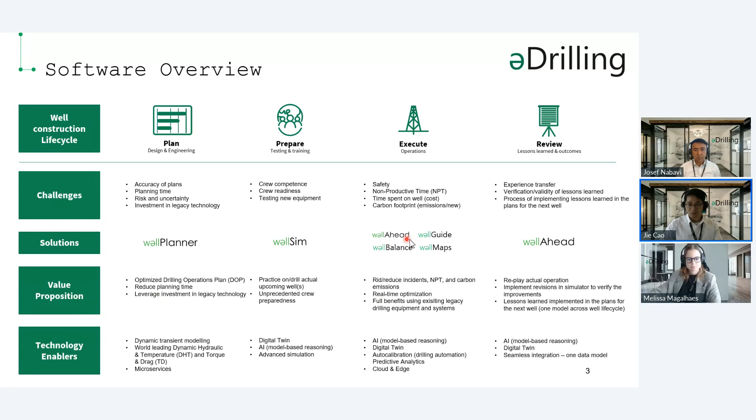Today, our main focus on hazard detection and avoidance will be using the software called wellAhead, shown in the middle. But of course, you are more than welcome to ask for a demo of other applications if you are interested.

So next, drilling hazards, as we all know, are the most unwanted situations during operation, which might lead to severe problems or disasters and increase the expense due to NPT or remediation operations. So to reduce or avoid that, the main technology behind our software wellAhead is 3 cornerstones as listed here. First is the dynamic transient modeling, which combines the thermal-hydraulic wellbore model with the torque and drag model, embedded with a theoretical ROP model.

So based on those dynamic models, we have built a digital twin together with real-time streamed data from the rig. And in terms of detecting potential events or hazards, we used model-based reasoning, a part of AI technology, to detect anomalies by comparing what we observe from the actual well or rig with the predicted behavior from our digital twin and modeling. Based on this comparison and detection of discrepancies, we detect potential anomalies or hazards that we might encounter in the near future.

So all those three main technologies enable us to do a lot of jobs like automatic detection, diagnostics, predictive analysis, analyzing what-if scenarios, and also forecasting your drilling performance. So that's the main technology we have been using in wellAhead.

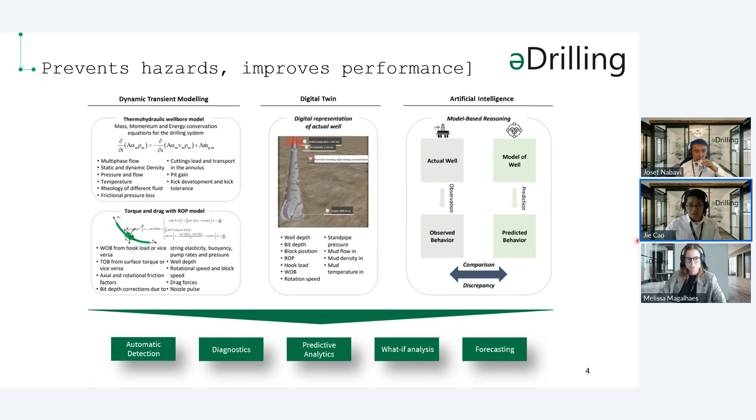Next, more specifically in wellAhead, it helps us to do automatic monitoring and predictive analysis, so as to avoid hazardous incidents, to reduce or avoid rig downtime, and to make more informed and better decisions.

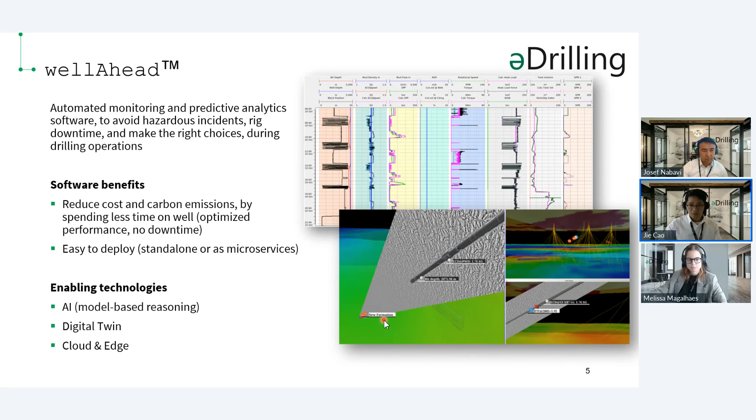So that's mainly wellAhead, which we used for today's topic. This software and technology has been there, as I mentioned, since 2008, and right now it has been applied cumulatively to more than 400 wells.

Next, I would like to hand over to our expert Josef to talk about more specific examples of how we help customers avoid hazards or incidents and increase drilling efficiency. So, Joseph.

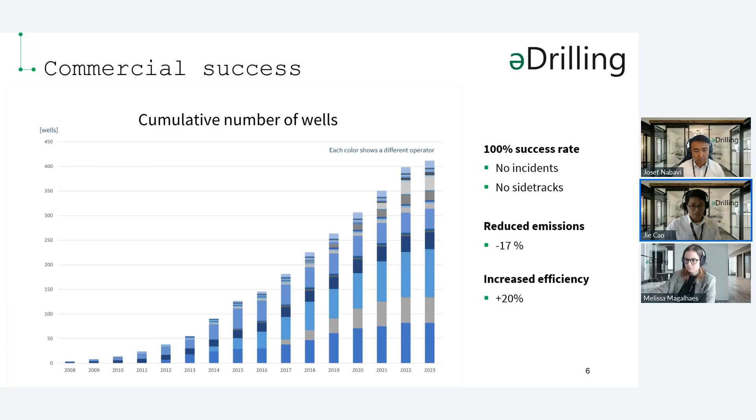Thanks, Jie, and hello, everyone. My name is Josef, and I'm going to share with you some actual examples of how wellAhead reduces incidents and NPT, increasing the safety of the well and its efficiency, and reducing carbon emissions and costs. Before I go through issues avoided by wellAhead, I would like to shortly introduce our wellAhead product.

So what is wellAhead? wellAhead is the product for real-time automated monitoring, real-time analysis, and live well support for different kinds of operations, from drilling to tripping and cementing operations. Maybe someone is interested in how the product can actually be deployed. Is it feasible in my current environment, and so on.

So wellAhead can actually be deployed in both cloud environments and edge environments. It can also be deployed as a local on-premise installation. In addition to that, if you don't have these kinds of solutions yet, you can of course install wellAhead on your local computers and PCs as well. So that's about the deployment of wellAhead.

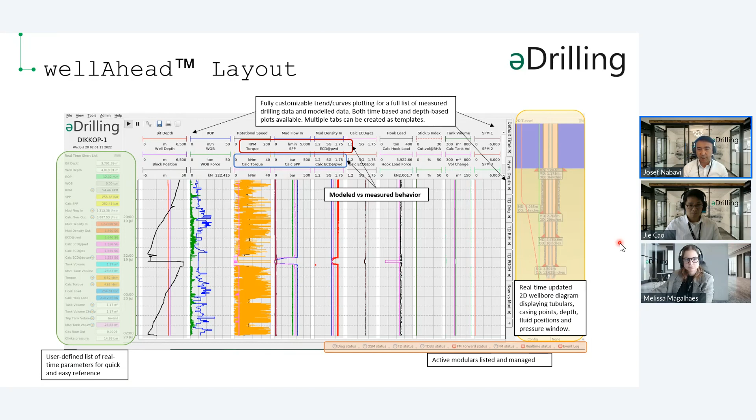measured data. So when I'm going through some of the examples now, you will see that we have used the Discovery Web to visualize our data. And before I go through the example itself, as you see, this layout is from Kongsberg's digital discovery. So they are using our modeled data to visualize on their side. So then it's used by the customer.

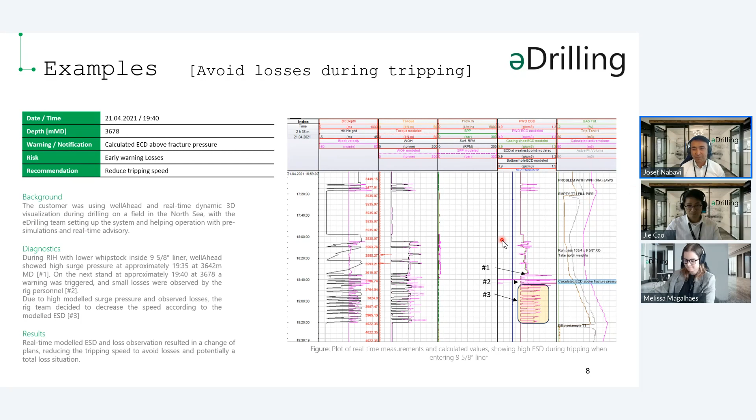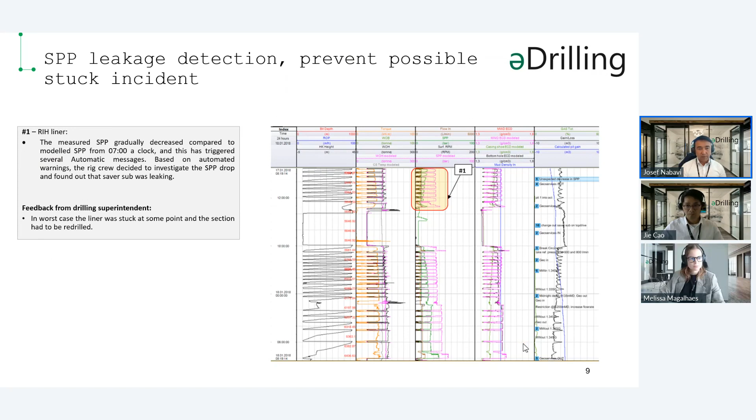The feedback from the drilling superintendent in this case was that if you had continued the same way without detecting the leakage on the standpipe pressure properly, you would have got stuck with the liner at some point, and then you would have had to redrill the section, basically. Yeah, and the next one.

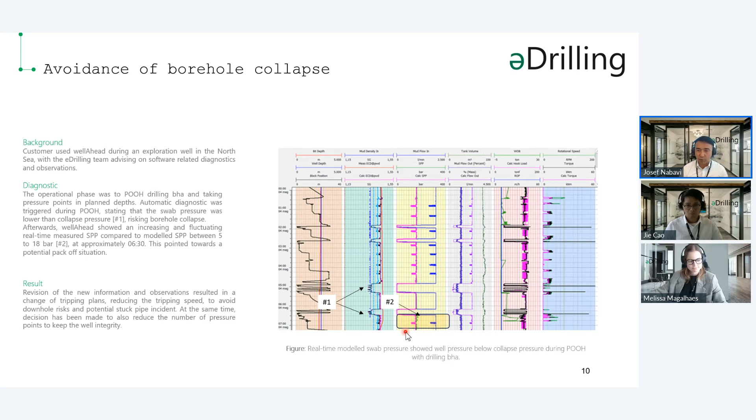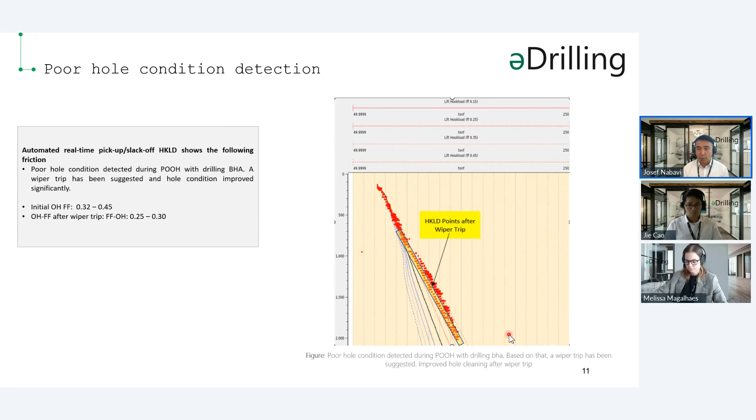So they ran a wiper trip, and as you see, the highlighted points are the pull-out-of-hole points with the wiper trip BHA, so the hole condition is much better. And after that, they ran in hole with the liner without any issue. So these were examples of how wellAhead helps avoid issues, and based on that you can save time and drill your well safer and faster. And by drilling your well safer and faster, you reduce carbon emissions and save money as well.